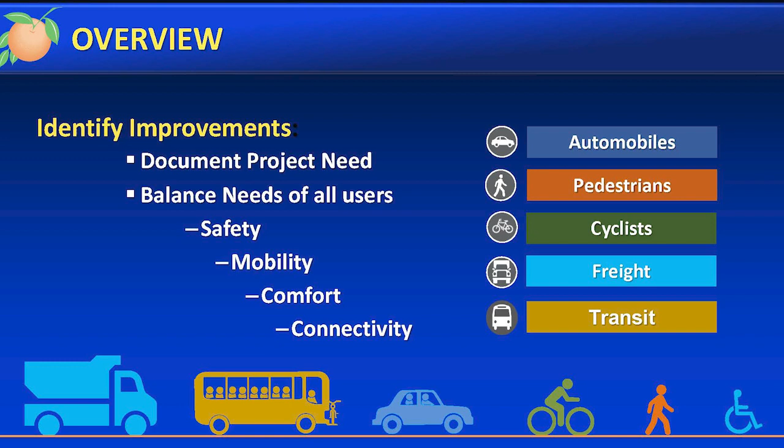To get to the preferred development, we go through the data collection phase, along with analyzing the conditions, and then we develop an alignment, and then we have a public engagement, which we had on November 3rd. Some of you were here for the November 3rd meeting. We took your inputs and we put it into the preferred. This is our second public meeting where we'll take some more input, and then we go to the board in March.

So we're going to go through the existing conditions. The study begins at US 192 and ends at Hartzog Road, which is approximately 1.6 miles. Presently it's a two-lane rural section with no curb and gutter, no sidewalks. Sidewalks are down at the southern end of the project. The corridor is largely undeveloped, although there's a lot of development moving fast along this corridor.

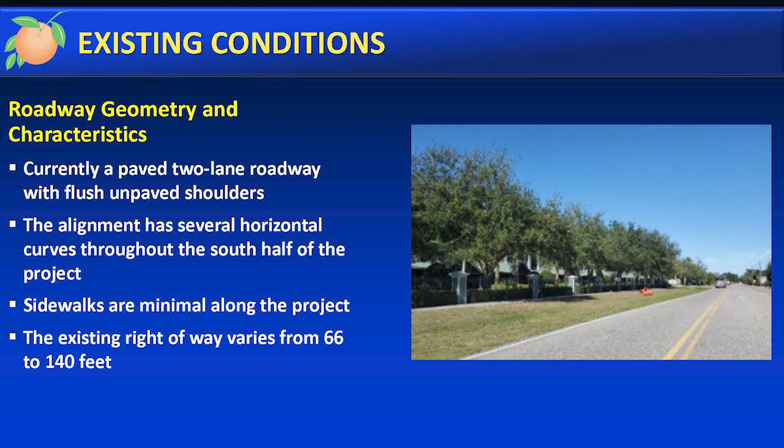So, going to geometry and characteristics. As I said earlier, there's a two-lane roadway with flush unpaved shoulders. Sidewalks are intermittent, and there's no existing stormwater ponds along the roadway; with this improvement we'll have stormwater ponds to serve the roadway.

The current land uses, as you see here, are mostly residential, some houses and apartments, places like the Palisades, and the future land uses are anticipated to be mostly residential and some commercial along the way.

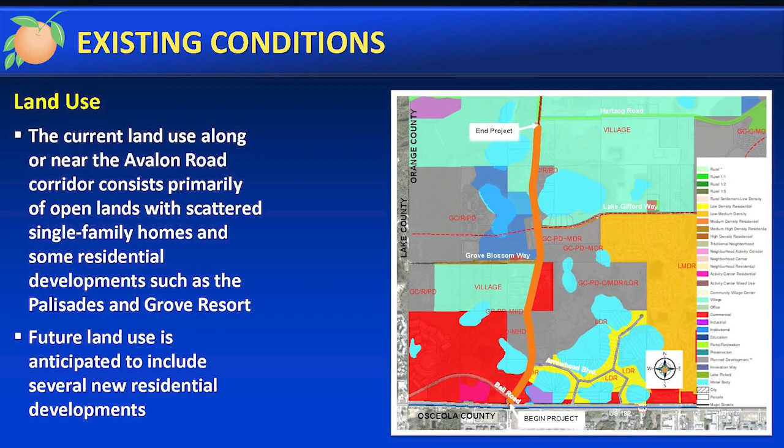The drainage: this is located in the South Florida Water Management District. The drainage currently flows freely across the existing corridor. The roadway runoff is currently collected on the roadside, is treated, and goes into the swales.

Next, we have the existing environmental assessment. An environmental assessment was conducted to identify potential wetlands in the corridor. We have some protected wildlife species; as you can see, there's a list there, gopher tortoises and such. A full wildlife protection survey will be done during design.

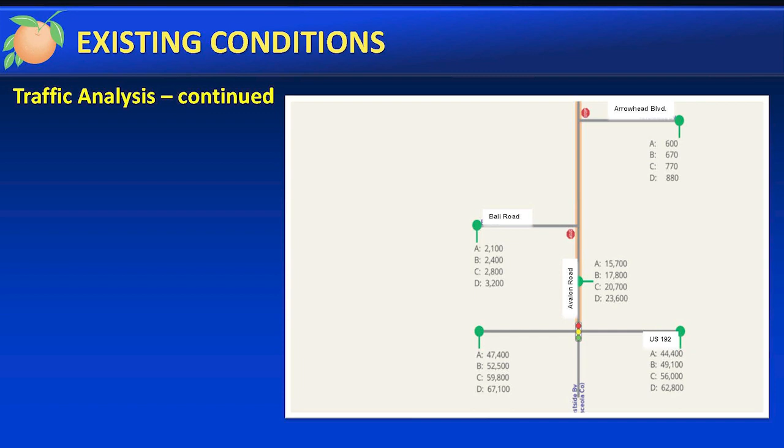Right here we have, during a 5-year period, there was a total of 149 crashes along the roadway. 34 resulted in injuries, and there were also 40 crashes that happened at night, which indicates the potential need for roadway lighting at night.

Right here we have the context classification. It's an FDOT context classification, which shows it's a C3R residential, shown in the box up there. This designation consists of planned land uses and vehicle operating speed along the corridor. This designation allows 40 to 45 miles per hour speed and a medium density population.

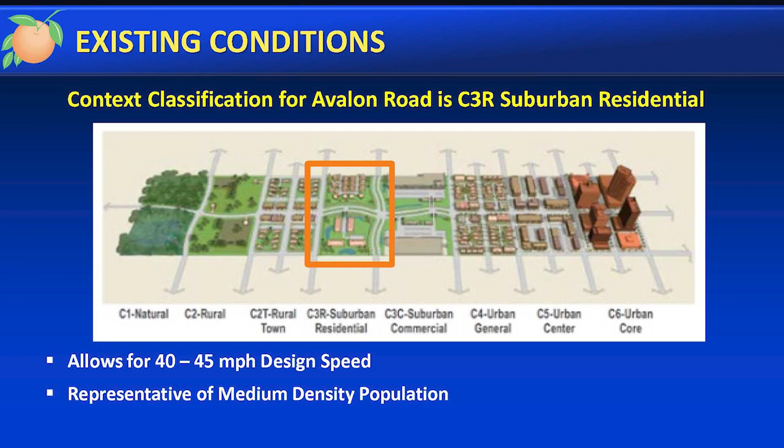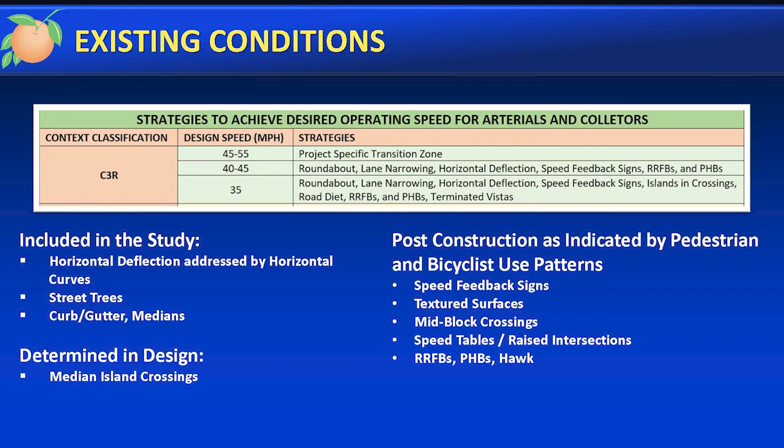Here are the strategies that are used to achieve the C3R. During the study, we studied the curbs and gutters, and horizontal deflections. During design, we look at median island crossings, and then in the future, when the road is built, post-construction, we go through pedestrian counts and whether or not we need the mid-block crossing or some speed signs or RRFBs, which are for people to cross the street.

If we move on to the recommended improvements, which we are all here for today. Intersection control evaluation. This is an FDOT, Federal Highway Administration program, part of the complete streets program, and it's very data driven. It's performance based, looking at which intersections and what will work best. This is usually done by a registered PE, and the purpose is to consider multiple context-sensitive control strategies when we're planning the intersections and modifications.

Access management, as we know, is carefully planned for location, types and design, including medians and median openings. So before access management, we had many conflicts along the way, and after access management, it reduces the conflicts.

A couple illustrations of access management. There's Valley Drive down at the corner of 192. To improve the intersection, we cut off the left turn into Valley Drive, which at present causes some conflict. We increased southbound to 2 left lanes onto 192, 2 right lanes onto 192, and 2 going straight.

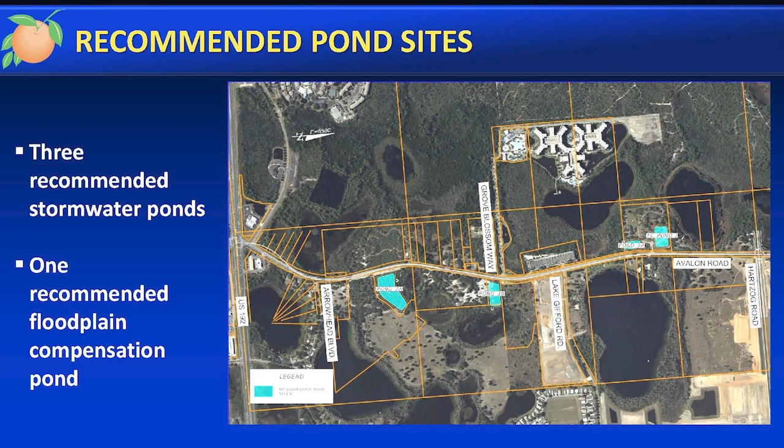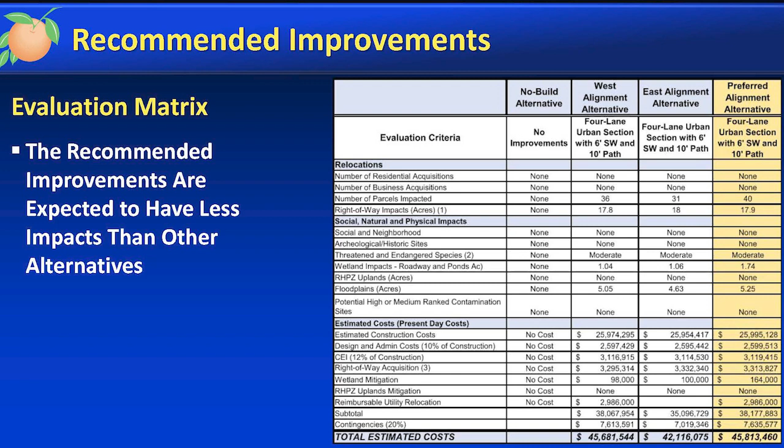Here is the matrix for the project. We had 4 alternatives. We had the no-build alternative, where you just do nothing and the road will just fail miserably. Then we had an east alternative and a west alternative, and we picked the recommended alternative, which is basically down the middle, utilizing the existing right-of-way. So this is the one that was best, according to the study.

Now we're down to public engagement, which we are here tonight. It's a very important part. We had the first community meeting, as I mentioned earlier, on November 3rd. And then we have this one to help formulate the best solutions. We used a number of communications. We had the newsletters, we had a project website. We worked closely with the commissioner's office, and they got the word out for the public to come out to these meetings.

And we'll be going to the LPA and the BCC in February and March. So look out, newsletters will be going out for those hearings. The next is the schedule. Right now we're in this second public meeting. We have two sessions for the LPA, a work session and a hearing. The work session is going to be on February 16th, and then the BCC will be on March 21st, and the LPA hearing will be March 16th.

Here we have a tentative, estimated construction schedule. As you can see, right now we're going through the RCA, which will be going to the BCC in March, and then there is funding for design. There's a 2-year process to design, and then there's right-of-way, which should finish in '28, and then construction should start '28 to '30. I should say, halfway through design, they start doing right-of-way acquisition. This is tentative, so it could move up.

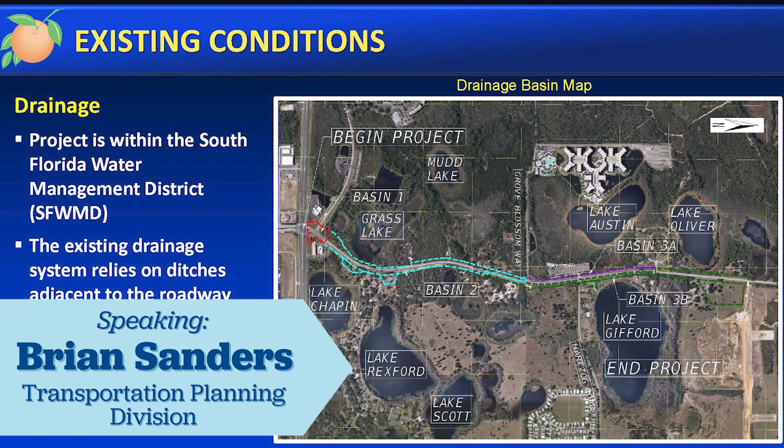So in terms of utilities, water, sewer, reuse, the county has franchise areas inside the county that other companies come in and serve. So regardless of where you're at in the county, you were designated to some utility, be it a franchise area like Toho or Orange County itself. So I would encourage you to contact utilities and say, hey, what's the process of extending? Here's where we live. Is there a plan?

Are you on well and septic now? Yep. Some areas may stay on that. In the extreme northwest where I live, there's a lot of people on well and septic, and everybody's waiting for development to come. But I hear what you're saying. You're sort of like an enclave. It's right over there, but I can't get to it.

Here it comes, right by our front door, and that's our question. You're gonna be doing this development out in front of our house. Where's the water going? Are we gonna get hooked up to it? Gotcha. All right, will you contact my office and we'll help connect you with our utilities department? That'd be great. I wouldn't be able to know without those experts, but I know that it's close.

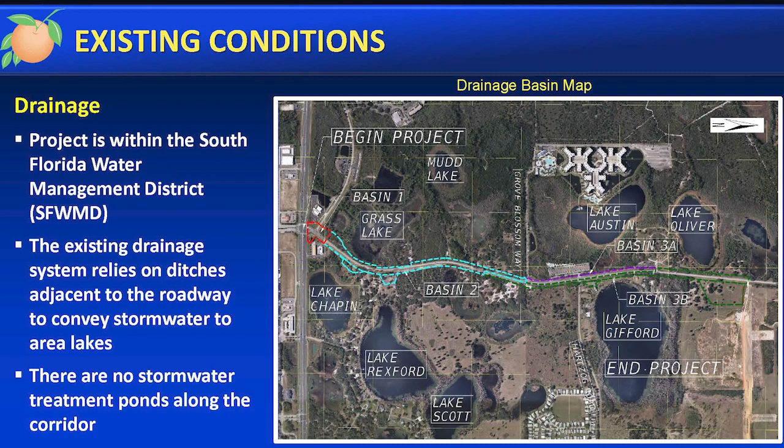I guess you'll have better information for our questions when it comes down to acquisitions. Well, in the meantime, if you'll reach out, we'll connect you with utilities folks, and hopefully they can at least kind of give you the process. I wouldn't speak out of turn on what their process is. Water service and right-of-way acquisitions are two different things, two very different things. That's something that we're talking about tonight, which will come with this project. And there's a process for that.

During design, they look at trying to minimize the right-of-way impacts. At this stage, we don't have the vertical survey information, we have the horizontal. So when the road comes in, they get the design and they're looking at the groundwater; the pavement has to be a certain height above all of that, which has an effect on how much right-of-way. Here, it's a pretty good estimate, but that can change, and they try to minimize that during the process.

About 60% through the design, they have a really good idea of the right-of-way impacts, and that's when they go out and they're looking for early acquisitions. If the funding is all there, they focus on stormwater ponds because that really controls what's going on. And then the strip takes, that takes a little bit longer. There's usually more of those. So through that process, you will be contacted, and at the time, we can hook you up with our real estate management and our right-of-way folks, and they have a whole spiel like we do for the road itself. Any questions?

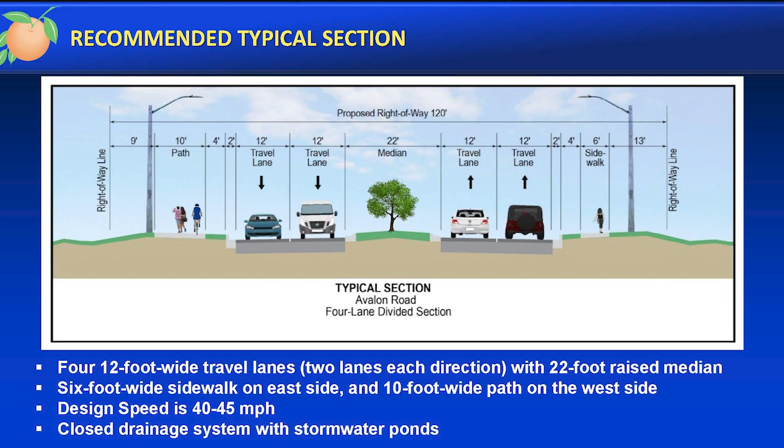Okay, that's fine. So, last time we met, we were waiting on the 1 cent tax that failed. You did point out that we're funded up to the design. And also, it seems like construction was going to start in 2028, but now I see, maybe you didn't have it on the PowerPoint last time, it's anywhere between 2028 and 2030. Yeah. So we did some additional calculations and figured that it took 2 years for design, another year and a half to 2 years for right-of-way acquisition, and 2 years for construction.

Okay, so considering the right-of-way process and the design sort of overlaps that, and I know sometimes right-of-way can take longer than expected, and sometimes it can be a whole lot shorter. What's the chance of that start of construction staying at 2028 and not being anything sooner? I think once we have funding, say right-of-way acquisition goes faster, say between 60 and 90 or 60 and 100, right-of-way finishes at the same time, and we have the funds available, I think we go ahead and do it.

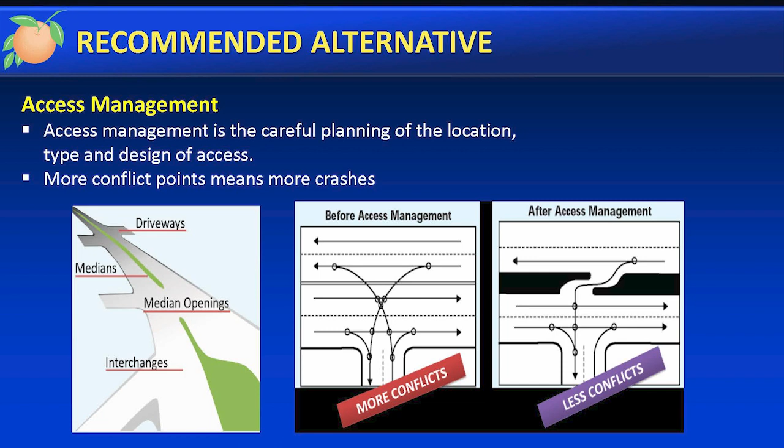That one will definitely help out, though. If that connection came, that would help, because a lot of the traffic is the big southern. Exactly. I think so too, and we've talked about this. I would like to see anybody who isn't residential to that area, for their longer trips or freight, getting to the 429, because that's what it's there for, right? If you think about trying to provide those links to 429 to Lake, it's just making sure that we're...

Each one of these roads are different. They're all on different time schedules, timelines. Each one of them has a different dynamic for construction. New Independence has some maintenance of traffic, not as much as Fleming. So all that has an effect. And we're going as fast as we can. But I agree with you.

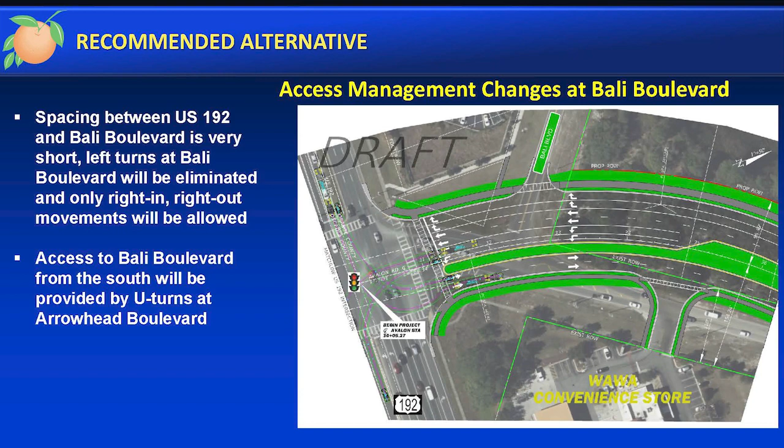The question I've got, from what I understand, is that when Western Way goes through the Flemings and over to Highway 27, it's coming out of Sawgrass Bay. That's 2.5 miles farther north on Highway 27. Our issue is the traffic that's coming south on Avalon Road. Most of that traffic is trying to go out to 27 and south, or south on Western Way to West Side Boulevard. They'll probably continue to go that way. So those westbound routes aren't going to do us a lick of good.

Well, it's going to do some good, because there's going to be diversion. The other road that's coming from Hartzog is going to be dumping into neighborhoods. That's not going to be a straight through, so that's going to be 25 mile an hour and stop signs and stuff, so that's not going to be an attractive route. So the people who are trying to get to Highway 27 to go southbound are not going to take either of those westbound roads.

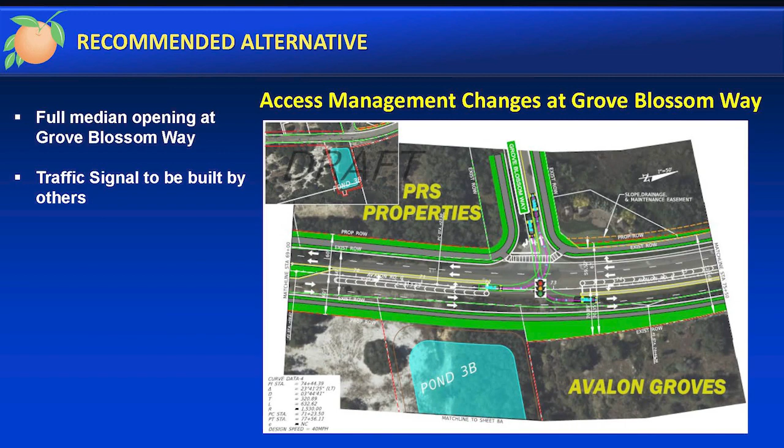You're right, you're right. So, I mean, it's not a plan to divert all of the traffic. There's a portion of the traffic. 30,000 cars, diverting 6 of them is going to help much? It's going to help. I mean, we could use more east-west roads. I would agree with you. There's some natural blockades out there. There's a lot of swamp.

I am a commercial pilot. I have lived on Lake Gifford for 27 years. I've been flying in the Disney area in hot air balloons, close up and personal. I've watched all of this development since 1995. I have thousands of flights in the area. I've seen every bit of development for the last 30 years. So I have a very unique perspective on exactly what's going on in this area and where the traffic flow is. I've watched it all come to life, and not just driving down the street and seeing something built along the street. I've seen the entire area from the sky.

Gotcha. So, you know, there was a unique situation. I don't think it will be unique coming, but following the first meeting, we had a total gridlock backed up all the way to Fleming's, and then Fleming's over to 429. And even the 429 was gridlocked back to exit 6 that brought you to 192. Mr. Smart Man here decided he'd leave his house to see how bad it was backed up. It took him an hour and a half to get back home.

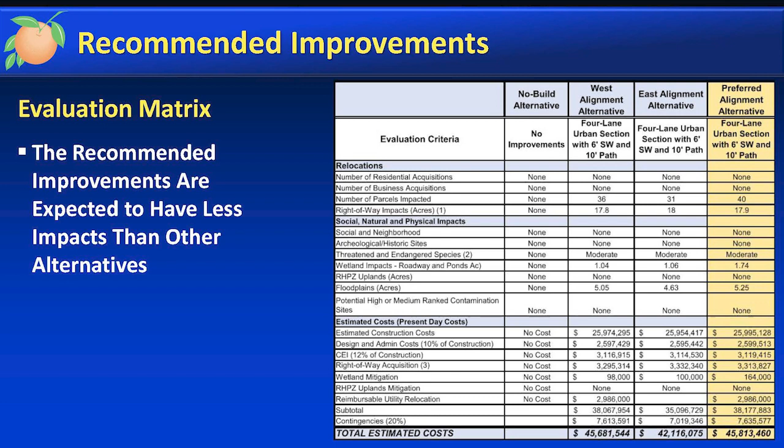Well, I went right instead of turning left because I needed to go somewhere, and then coming back, the traffic was bumper to bumper up to Fleming, so I was like, well, I'm going to go left and go around. But it was bumper to bumper, Fleming's, 429, 192, the full circle.

Yeah, the way roads are funded and the way development is permitted, roads and infrastructure always lag. When we're doing impact fees, you've got to build up so much impact fees, and then you have enough money to do the infrastructure. It's just a lag model.

I say everybody switch jobs. Switch jobs. Yep, everybody in permitting go into roads, everybody in roads go into permitting. Slow down one, speed up the other. We don't want the permitting guys in roads, I promise. No offense, permitting guys.

Being the fastest growing area here in Orange County and arguably across the country, this is the edge of the earth for infrastructure and just about everything. You guys don't even have a gas station out here, right? That would remind me of that. I know, I'm sorry. We've got Walmart where some of the pumps work sometimes and sometimes they don't. I can just imagine those lines.

So help is on the way. We're trying to process this as fast as we can. The sales tax could have helped in many ways. We're working with the Commissioner's office to fix and patch areas while the infrastructure is still in production to try to help mitigate some of these pains, but it's going to be painful. You've lived through construction of developments and roadways, the rough roads. For us to live another 6 years with. Yeah. I wish I had the wand, but I don't.

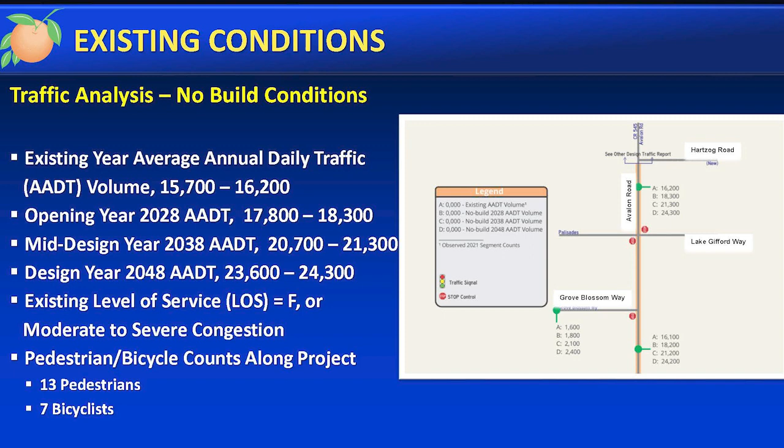It's unfortunate though, because we were involved a long time back when the Palisades was built. And we were wondering how in the world they could build that big monstrosity right up at the edge of the road out of nowhere, right across the street from our houses. And that was when we found out that the Roads Commission already had a plan for widening Avalon, and that we were going to be losing 30 to 40 feet of our front yards. And we found out that those plans have been on the books for 20 years. And that was when we found out about all of the villages and that we were part of Village I and everything else. Well, golly, if we've known about this for 20 years,

It's not an if you build it, they will come model. I understand. It's just not that way. The county does not have enough funding to build all this ahead of time and maintain it for a low volume of traffic for many, many years, waiting on development to come. That's just not the way it works.

Well, how did we get the 429? And I don't mean that in a nasty way. How did we get the 429? Did the toll people pay for that? The 429, yeah, they put out bonds and they built it. Okay. I remember the 429 opened up, and you drive down the whole 429 past 6 cars. Yeah, the Expressway Authority is a subset of the state DOT. But boy, oh boy, it's smart that they did that.

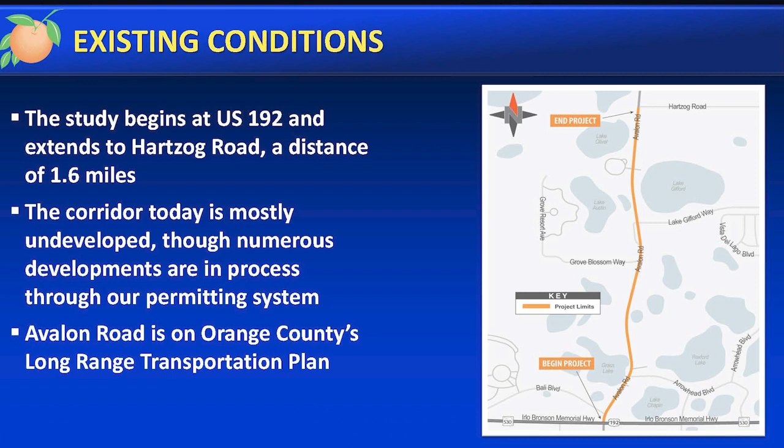Yes. Oh, okay. I saw you. I'm a new resident, I came from New York, I'm learning the new roads. Nothing to complain about yet. Thank you for being here. If you don't complain, that makes us all look bad. She'll think of something. I'm here. If she's not complaining, she can't really be from New York.

I'm sorry, I missed the presentation. When is this going to start? We've started the process of developing the project. The first step is a study phase, and we're coming to the end of that. Design is funded, we know that much, so that's another 2-year process. We don't have the vertical information needed for design. And so after that, we go into a right-of-way acquisition phase, a couple of years there, and then construction takes about 2 years. In an ideal world, if all the money was there, and no recessions, no strange things happen, it could happen. That's very optimistic.